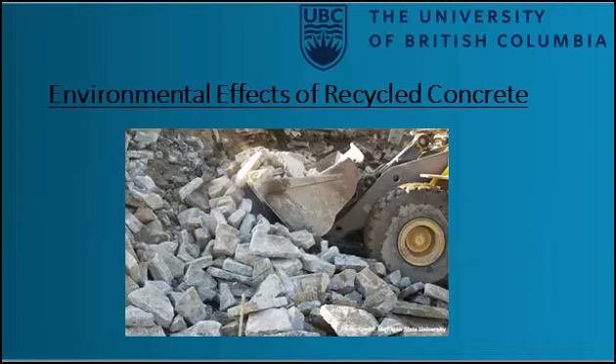I will be talking about the environmental effects of recycling concrete. The impacts of the concrete industry as it stands: concrete is one of the two major producers of CO2 in the world. It produces between 5 and 7% of the world's CO2 emissions, and there's over 1.6 billion tons of concrete produced annually.

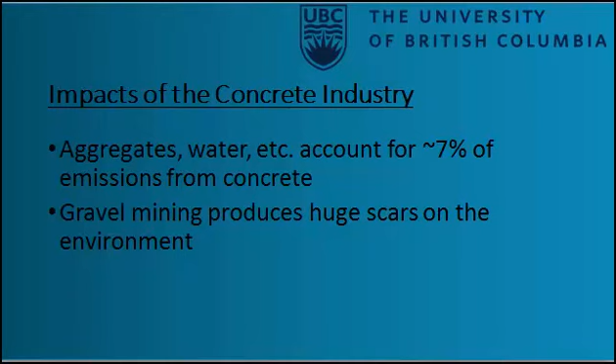Aggregates and water and other additives to the concrete only account for roughly 7% of the carbon emissions, but that is still a substantial amount on the whole scale, as well as the gravel mining for fresh aggregate produces massive scars on the environment.

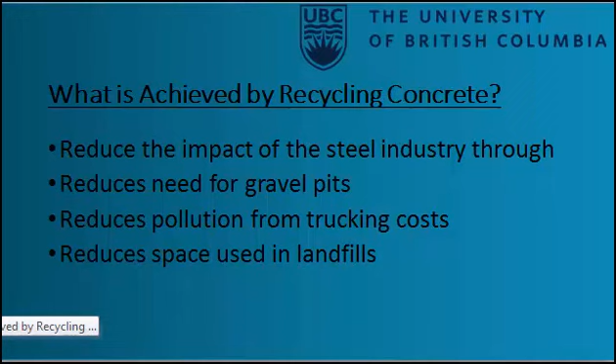What is achieved by recycling concrete is it reduces the demand for steel in the steel industry, reduces the need for gravel pits, reduces truck pollution costs, as well as reduces space taken up in landfills. Recycling just 1 ton of cement can save up to 5,150 liters of water and 900 kilograms of CO2.

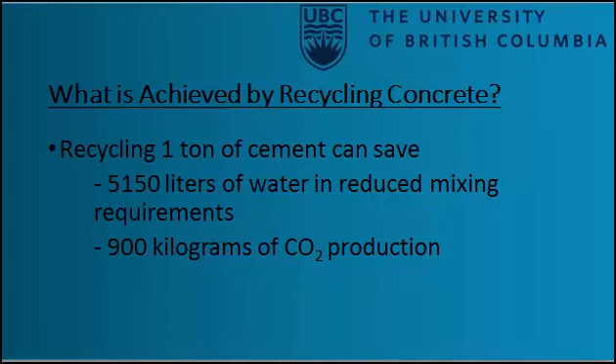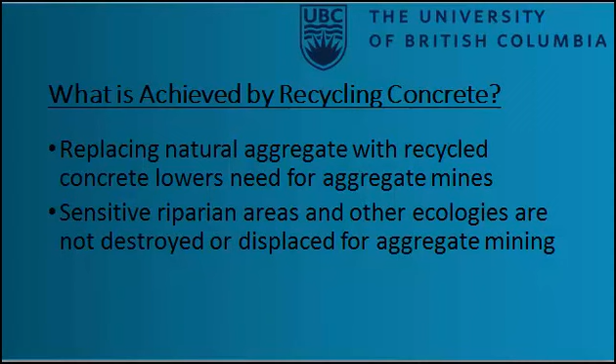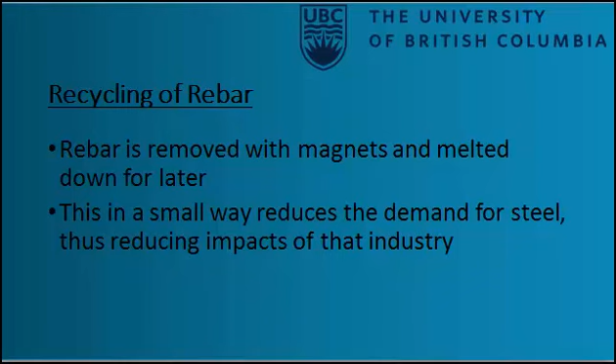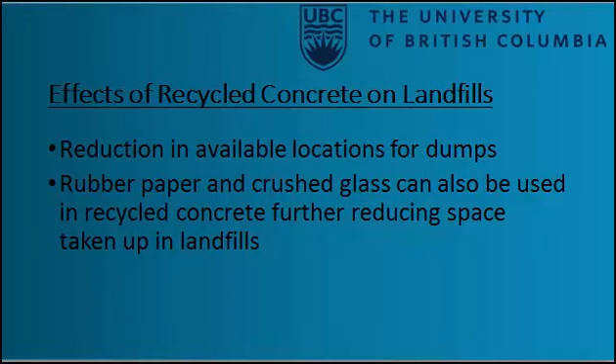There is, as I said, massive amounts of concrete in the world, and every year there's massive amounts destroyed. So the amount of concrete that is in landfills is very substantial, and the amount of land that's used for landfills in every city is very limited. So we really reduce how much concrete ends up in the dumps. And rubber, paper, and crushed glass can also be used as aggregate, and that further reduces the need for aggregate. Now we'll have Stephen talking about the viability of recycled concrete.

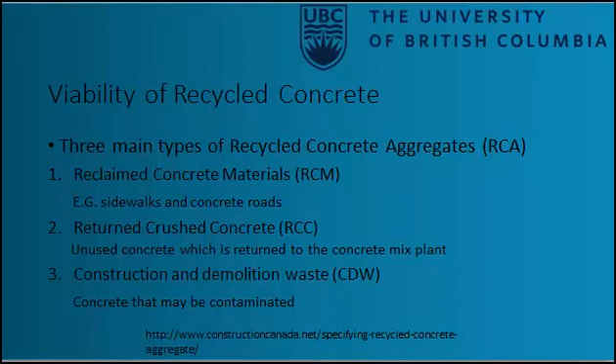Thanks, Justin. The viability of recycled concrete is important to determine which applications it can be used for. As it stands, there are 3 types of recycled concrete: reclaimed concrete materials such as sidewalks and concrete roads, returned crushed concrete, which is unused concrete that's being returned to the cement mixing plant, and construction demolition waste, which may be contaminated. Some of these contaminants could be wood, glass, plastic, and in my case, beer bottles, beer cans, and organic matter. Usually this contaminated concrete is rejected. However, if some of these contaminants can be removed, then the concrete will be used.

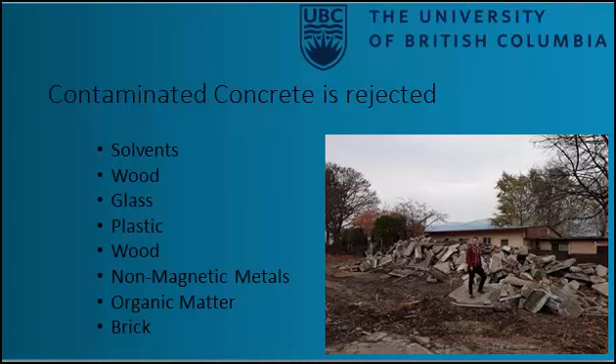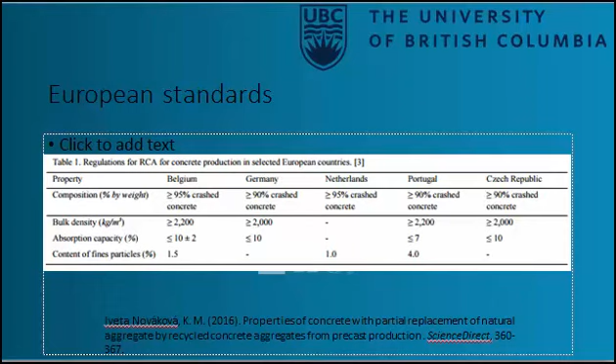One study found that the European countries have standards for over 90% concrete in their mix, where others are 95%. This could be 5% other. The study also found that residual cement was left over in the recycled concrete, which created complications during the mix design. Increasing the water-cement ratio in conjunction with the addition of fly ash and nanosilica will counteract a decrease in strength and durability. It was found that a 20% replacement of coarse aggregate with recycled concrete aggregate would increase carbonation depth and increase compressive strength by 5.8%.

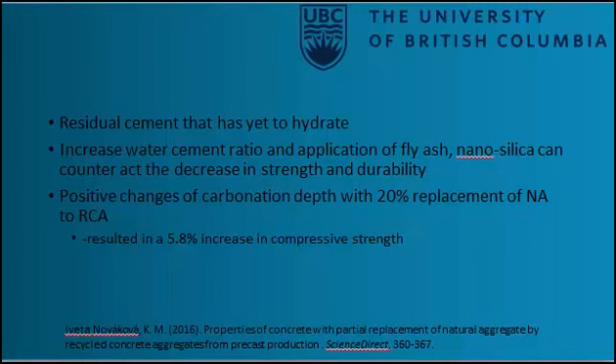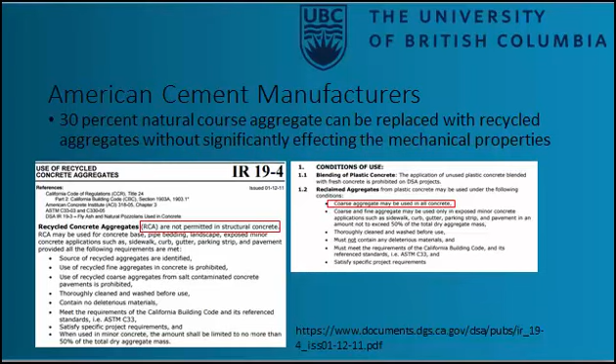An American standard found that 30% replacement of natural aggregates resulted in little effect on mechanical properties. However, a California standard dictates that no recycled concrete aggregate be used for structural purposes. However, all coarse aggregate can be replaced for minor concrete applications, with only a limitation when it comes to fine aggregates. However, as you can imagine, it's off-putting to use recycled concrete if you need to use unfamiliar standards.

That's why one study was conducted to find a method to have recycled concrete with similar coarse aggregate and mortar that resembles and has similar properties to natural aggregates, in order to use the recycled concrete with more commonplace standards. This is the equivalent mortar volume method. In this method, recycled concrete aggregate is treated as a 2-phase composite of residual mortar and the original natural aggregate. It quantitatively includes the volume fraction and relevant properties of each phase, which allows us to use the original standards.

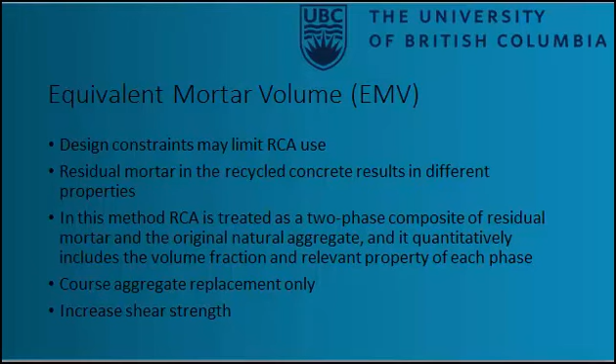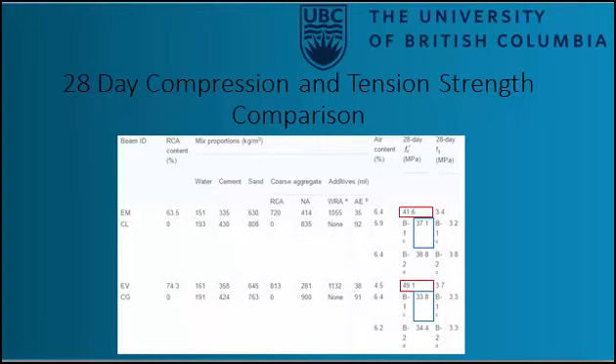This table shows the results of their study. As you can see, the 28-day strength is similar to natural aggregates for both tensile and compressive strength. Now Brandon will talk about the uses of recycled concrete.

Alright, in this section we'll be discussing the uses of recycling concrete. Recycling concrete has many different uses, some of which may include reducing the environmental impact by not requiring as many trucks, which will reduce pollution emissions and in turn will reduce costs. Recycling concrete is also a valid substitute for dried aggregate as a base layer for an asphalt pavement and will serve as an alternative for a non-renewable source.

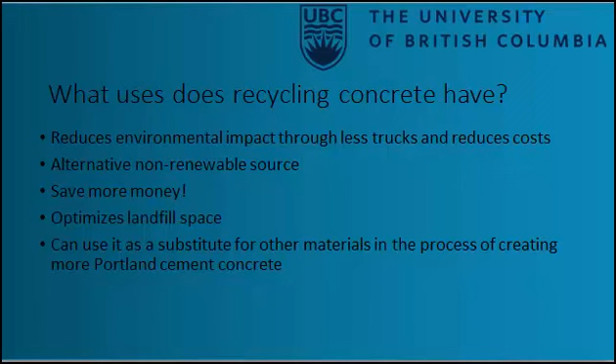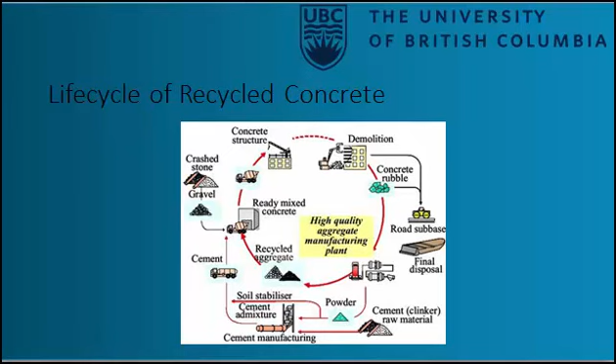Recycling concrete has many different applications aside from resource savings. These include using them as a dry aggregate if and only if it is free of contaminants. Methods used to check if concrete is free of contaminants may include, but are not limited to, a physical examination of a section of demolished concrete and picking out a section suspicious of contaminants and sieving it.

Recycled concrete can also be used as a base layer for asphalt pavement through a process called rubblization. Rubblization is the breaking down of concrete pavement into smaller pieces and using it as the base layer in an asphalt pavement. It can also be used for decommissioning of nuclear power plants.

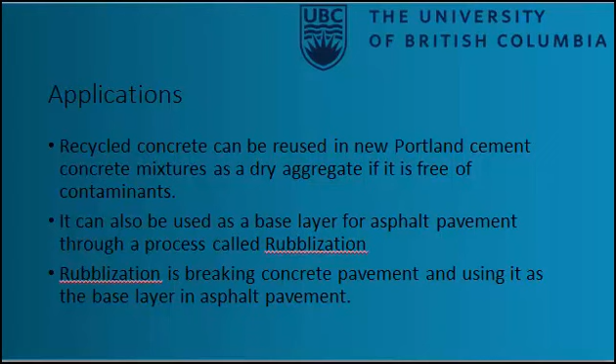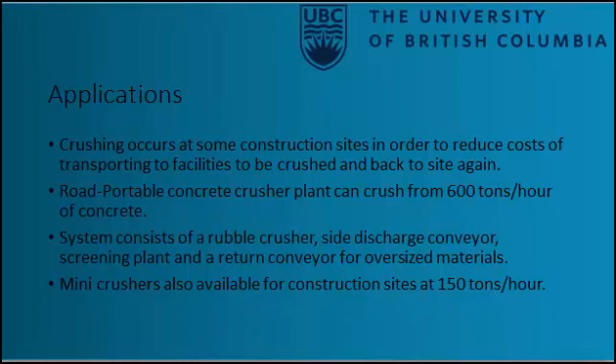There are other ways to reduce costs, such as bringing a crusher to a construction site. There are large crushers that can crush up to 600 tons per hour, and smaller ones that are obviously more agile and can get around more that can crush up to 150 tons per hour. The system of crushing on site consists of a rubble crusher, side discharge conveyor, screening plant, and a return conveyor for oversized materials. This is the crusher.

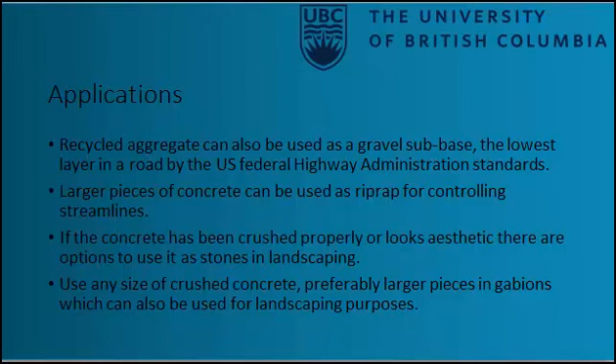As concrete is reused over and over again, it will lose its ability to regain some of the compressive strength over a given amount of time. Earlier generations of concrete, being first and second generations, will be used earlier on in the life cycle. Recycled concrete in later generations may be used for different applications than earlier generations due to the change in the compressive strength over time and it having to take a longer period of time in order to reach its full optimal strength. I will now hand it over to Ryan to discuss costs.

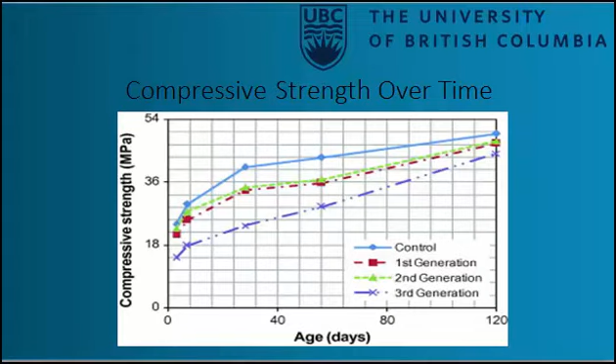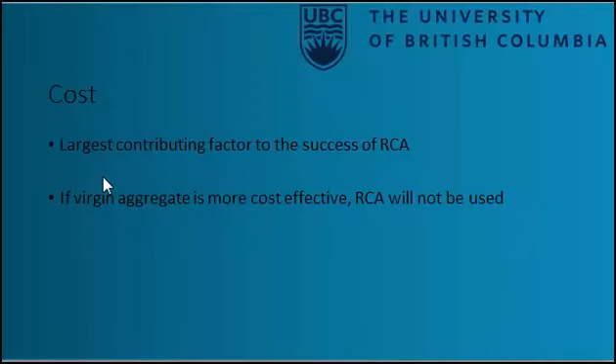Thanks, Brandon. So, one of the things we have to look at is the cost of recycled concrete aggregate. Once we've determined that recycled concrete aggregate is environmentally friendly and it can be viable as its compressive strength and tensile strength is comparable to new concrete, we have to look at the cost, because if this material costs 2 or 3 times what virgin aggregate costs, it will go unused.

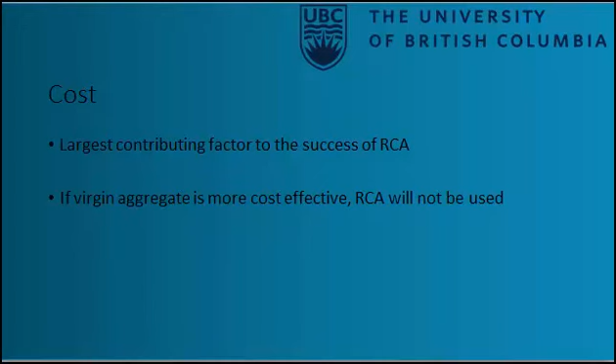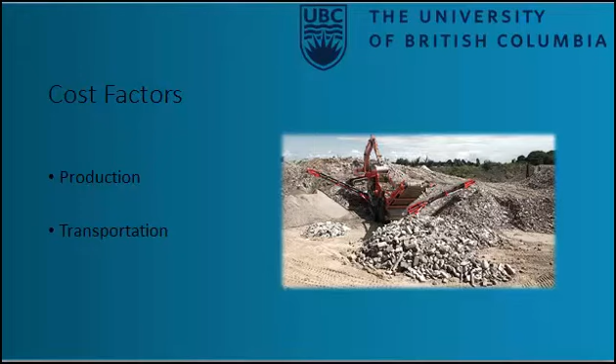The various cost factors that affect this are production and transportation. If you compare it to virgin aggregate, the production is done possibly on site, whereas virgin aggregate is produced in a mine somewhere far away. Then that comes in the transportation. If you produce your recycled concrete aggregate on site, it will be much cheaper, whereas a virgin aggregate has to be transported, often a very large distance. So if we aim to lower the costs for recycled concrete aggregate, it can become very competitive.

The ways to lower recycled concrete aggregate cost are to reuse aggregate on site. A great example would be regrading a highway, where you can take off the top layer of rigid pavement and use that as a subgrade if you're widening a highway, for example. Another thing you can do is use efficient graders, which Brandon already mentioned. You want the right size grader so that you don't pay too much for the machine, but you also don't pay too much for labor.

You also want to ensure that you have a well-graded aggregate so that you have the right proportions for your coarse aggregate. If you don't have a well-graded aggregate, then you might have to supplement this with virgin aggregate, which will increase your cost.